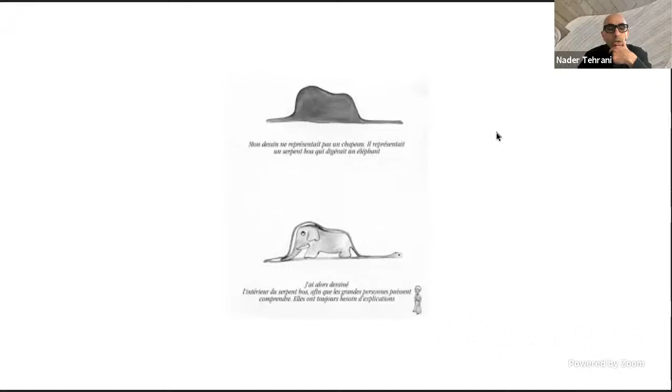The part to whole reciprocities comes into conversation with The Little Prince and the way in which our semiotic minds come into conversations with the things that we see. The hat or the ingested elephant suggests one, a reading that is iconic and on the surface, the other one, a deeper reading that has to do with the constitution of the inner workings and the organs of an architecture as expressed on the outside.

We've seen the way in which art is able to defamiliarize the known of a classical building, but sometimes we forget that within that same classical building, normative to our eyes, are organisms and configurations that are radical departures from the symmetries that we may see on the outside. So the complex and contradictory alignments and alliances that we make are part of this discussion.

In the context of the tectonic grain, more of a metaphor in my mind, it's a conversation not only about the directionality or the affect of a building, but it also has to do with the ways in which we understand things at different scales. The Devil's Tower from a distance and as a skyline exudes one reading, but at a close-up, we begin to see the horizontal traces of other geological strands that are embedded within that set of striations.

In the context of social engagement, as I said before, there are few projects that are more explicitly engaged in our collaborations with others. And the theme of control and collaboration are part and parcel of a common set of predicaments I'd like to underscore here.

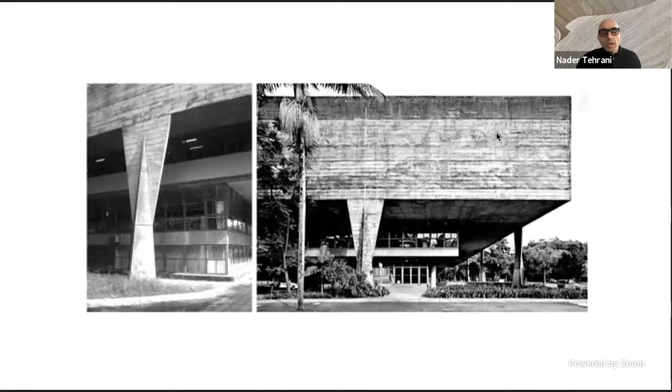The pedagogical buildings, as I said before, are these buildings, all of them schools of architecture somehow, that were born out of the crisis in 2008 and what kept us aloft from 2010 to just a couple of years ago, where the materiality of those buildings, their mistakes and their successes, invariably become didactic in their mission. And finally, our engagement with political entanglements has to do with a range of issues.

But political entanglements deal with a wide range of things, dealing with architects attempting to re-engage in the public realm in a world increasingly privatized, in our ability to think through infrastructure and engineering as part of that commitment to the public realm, and/or rethinking programming before we even start to imagine architecture.

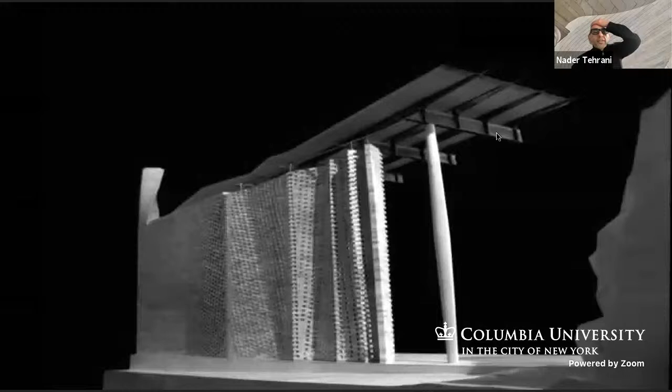So with that, what I'm going to try to do is actually go relatively fast through a whole range of projects, because it's less important to understand each project as it is to understand the perspective from which they emerge. The monomaterial ethic emerged in our minds very early on, some 20, 25 years ago in Casa La Roca, and our interest in thinking through, sorry, let me try again.

Is the animation showing or not? Apparently not. It's not now, but it was. Was it? Okay, let me try again. Is there an animation? No, it's just white. We're just seeing white. Oh, I tested it before. Well, okay, it doesn't matter.

What matters is that this was a building that, in the tradition of Lewerentz, we discovered through the invention of a detail that was somewhere between a running bond and a Flemish bond, what we called a variable bond, to exact a seam, a folded seam, through which lateral stability would be given to a wall.

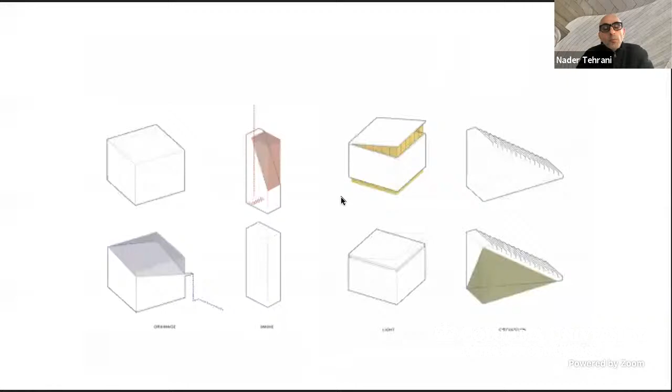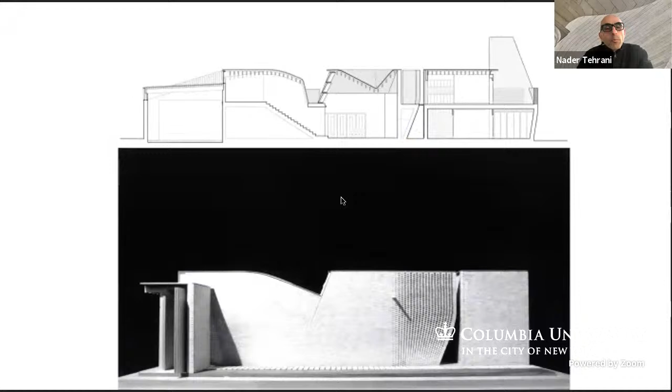We did indeed get to practice this and build it in a different project in Tongxian, China, where the materialities and the programs that were embedded in the context of this detail got played out in terms of the mechanical systems that were embedded in there, in terms of the areas of figuration that required bending and folding within the context of its facades, and where the brick is not merely just a material, but it is catalytic in the formation of the figure of the building and its organization in its entirety.

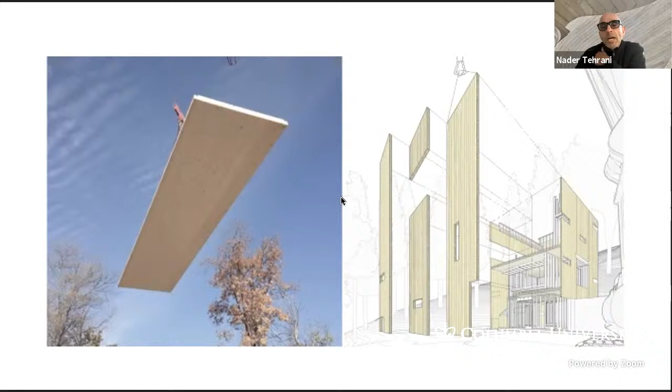Now, if that were to be seen as a detail, that detail can be quite large also, because in the context of cross-laminated timber, for instance, those bricks are planks that are 5 feet by 40 feet, as it is in the Sharon building that is here being organized for the Biennale, a structure that is essentially a rural apartment building composed of a series of apartments, all identical, circulated around with a single stair,

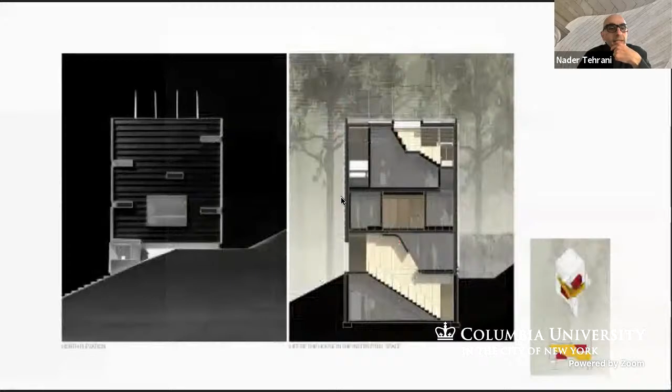with the idea that the CLT can only work actually if it is paired up with a stud wall on the interior, because that is the only way to ensure the transmission of air and electricity and all of the infrastructures that would go inside of it. A building that is relatively simple in its organization, because the stair effectively organizes it, but then most importantly, because of that, one gets to take advantage of its net to gross area by occupying all of the spaces above and below the stair, making it one of the most efficient typologies and organizations that we've done in the past.

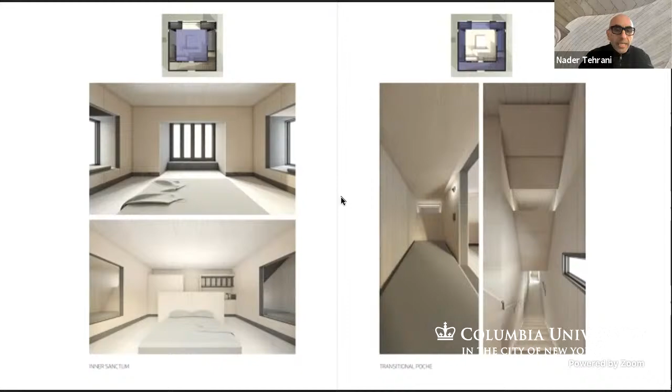And it's composed obviously then of two types of spaces, an efficiency that has a bed, closet, kitchenette, etc., but then a poché space around the edge of the building that is composed of these two conditions of showers, of toilets, of bunk beds, and these interstitial spaces, and then the staircase on the opposing side. And so the concurrence of these two is what creates an effect in this monomaterial condition.

The catalytic detail then has to do with the way in which certain details preempt and condition our understanding of certain architectures. Here, in the context of RISD, where Amal and Dan have their own building down the hill, we were tasked with the master plan of the freshman quad, within which North Hall, the dormitory, is composed as an almost too large a building that we wanted in one way or another to contextualize.

The idea of contextualizing such a building is almost ridiculous given its scale, but we decided to work through the shingling systems of the neighboring buildings, of which there are a lot, and draw them into dialogue with the east and west facade, which are the long faces of our building.

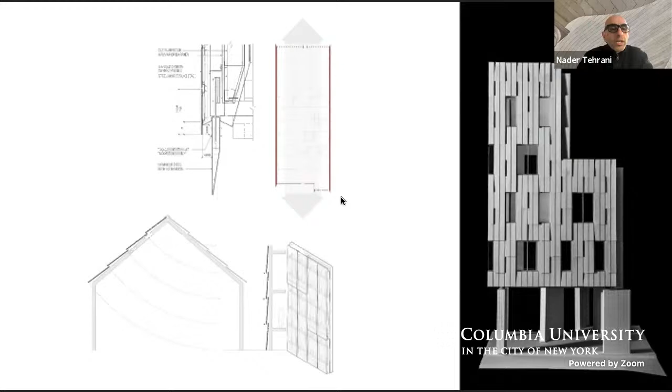This shingling then acquires a very radical presence given the orientation of the building, east and west, gaining the light and the shadow that it requires to give depth to what is otherwise a very thin face. But most importantly, the catalytic detail has to do with the condition of shingles overlapping each other, almost like an

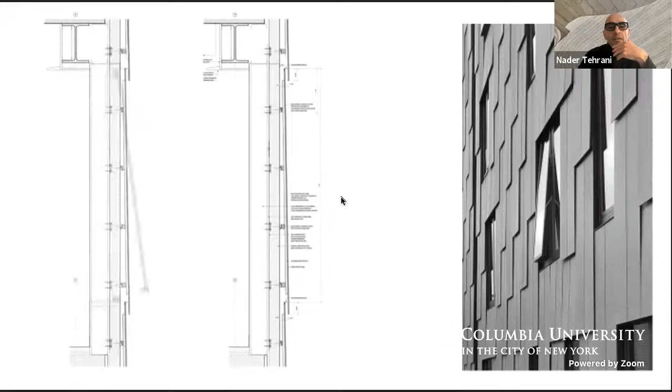awning window, and then using the alibi of the awning window to also reciprocate with the shingles. In other words, that skin and the window are doing the same thing and speaking to each other in the context of a detail that is trying to mute itself in the context of the urban landscape.

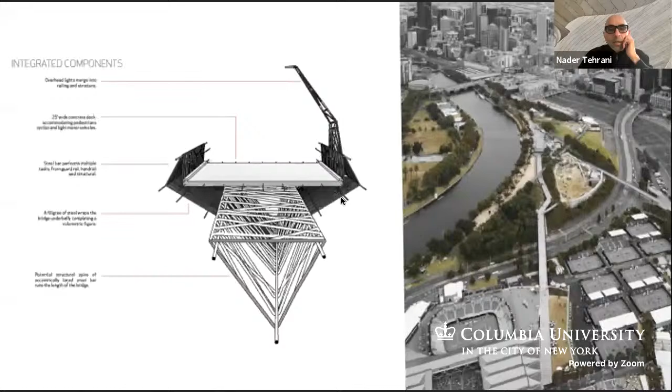Similarly, when we're dealing with an urban design proposition to create a connection between downtown Melbourne, the Yarra River, and the tennis open of Melbourne, we sought the presence of the means and methods of how to build with rebar as the precondition for designing the entirety of a pedestrian bridge whose presence is more known because of its connection to the park than to the tennis open.

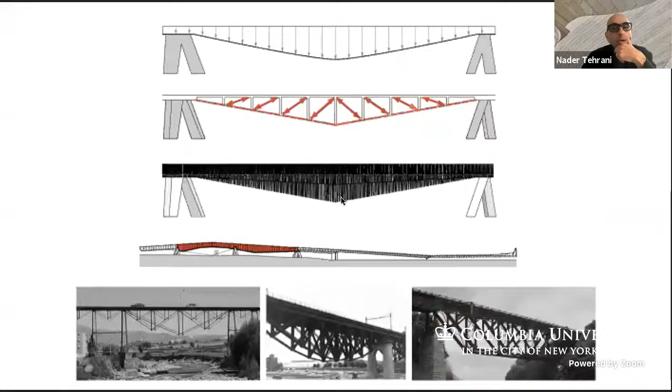The idea was to build a massive bridge over the highway that takes advantage of the maximum moment in the center of the bridge, dipping it down, but also eliminating the apparent difference between structure and skin by weaving the rebar both on the longitudinal and lateral axis and giving it a kind of presence, a web-like presence on both

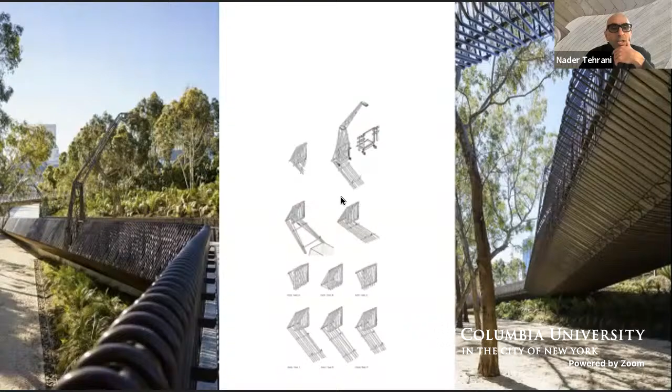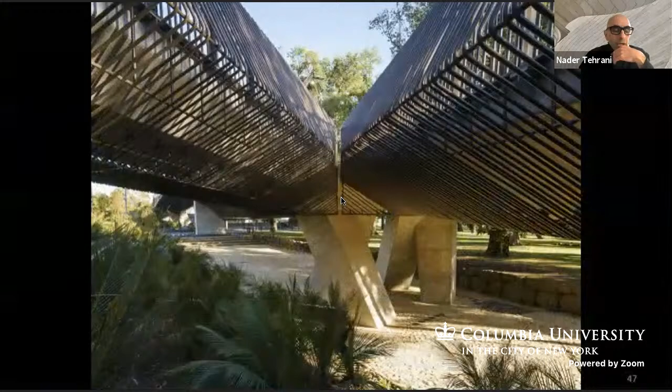axes. The rebar, in fact, has different dimensions, and it has a presence as an underbelly, as a rail, as a guard, and ultimately as lighting elements that speak to the silhouette of the skyline of Melbourne itself. The project lives in this liminal space between above and below. It is occupied above only 2 weeks a year, and the majority of the year lives in the nature of this park as a kind of trellis structure.

In the context of the Daniels School of Architecture, the Daniels Faculty of Architecture, Design, and Landscape, the operative detail of the shingle revolves in a fashion that runs north-south, using the cladding system as a mechanism to reinforce the lateral axis from east to west. The shingling conceals the apertures. The apertures are allowed by the shingling itself.

And in this sense, they reinforce the pedestrian access to the buildings themselves as they conjoin, the north side being the new and the south side being the neo-Gothic structure to which we attach. The idea of figuration and configurations also speak in tandem to each other.

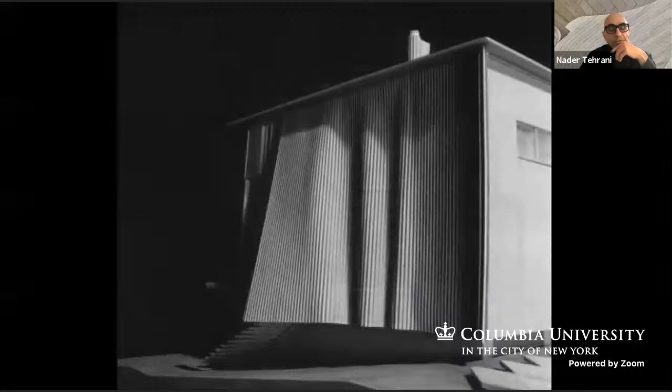In the context of the Weston House, for instance, the discipline that reigns it has to do with the idea of a ruled surface, the knowledge that the line at the top of corrugation and the bottom are the same length, and as a consequence, they allow for the material distortion to enable the unruling of a surface.

The animations just aren't showing, but let me see if I can cheat and show it this way. It's because of the presentation view, actually. So you might have to choose between the notes and the presentations, but hopefully that'll work. Well, I'm going to scroll through this without trying to fuss, although my wheel of death is now on the screen. Do you see it? Luckily, we don't know. Okay, well, now I'm stuck. So there's a commercial break here, but let me see if I can drag this through. I can't. I'm sorry. I apologize for this.

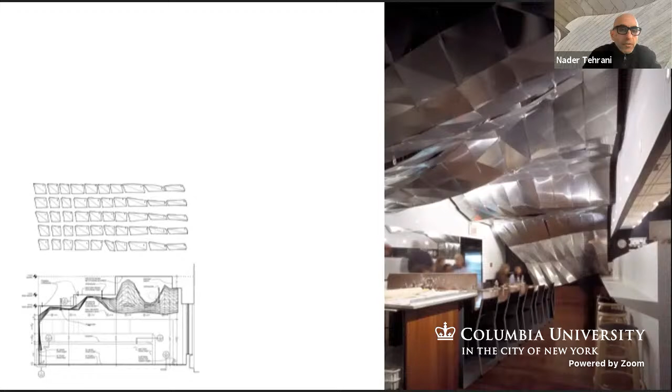And it's not that important anyway, but I think understanding that the discipline of the ruled surface and the relationship between a part and whole plays itself out in a similar way, though distinct, than Upper Crust, where the triangulation of flat sheet metal is able to navigate complex geometries and surfaces that in

our project in downtown Manhattan are then pixelated as smooth surfaces navigating complex structural forces from above and programs that are contained within the bodies of this dining and servery area for this corporation.

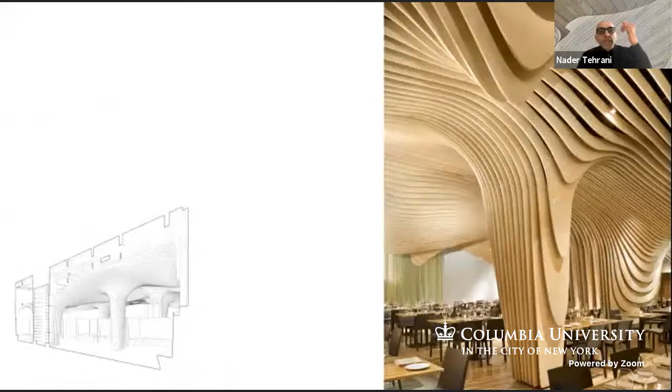Similarly, here, all of these, by the way, share one component that will come into play in the idea that the reflected ceiling plan in these contexts has a significant and vocal role, that it is maybe arguably the most important elevation in architecture today insofar as the sprinkler systems, the lighting, and so many of the elements of architecture come to ruin our lives.

But in the context of Banq, the laminar conditions of these proscenia that adorn the columns, the wine room, and contain all of the mechanical equipment are all a kind of precursor to the Adams Library that we are almost completing right now, which involves an important topography.

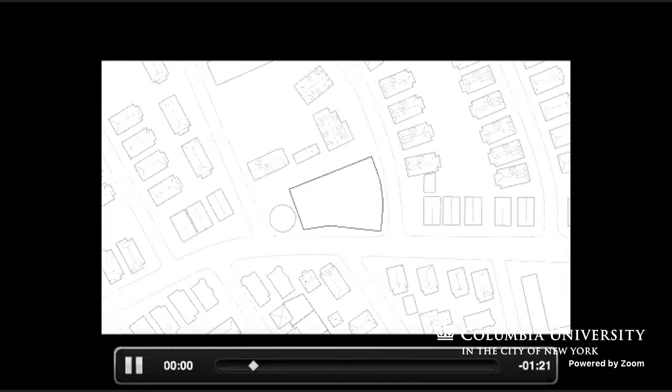And if this doesn't work, then we're really screwed. I'm going to try this. I think what you may want to do is unshare and then just reshare in the presenter mode. So you won't be able to see your notes for the animation, but we'll get the animation and then we can switch back after. All right, no worries. Let me get out of this. Let me exit 1 second. The wheel of death is taking over our lives for another round. So 1 second, I apologize.

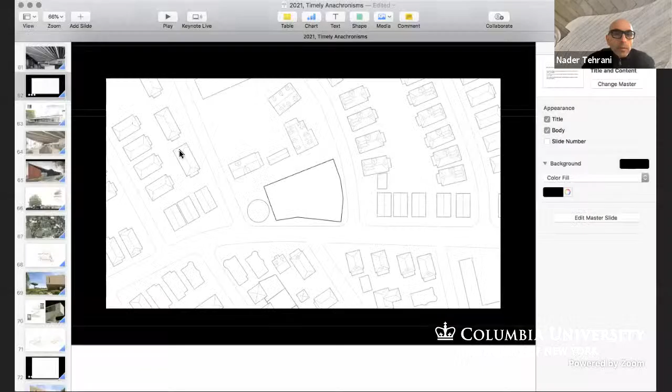Okay, so you're saying share again, like that. No, I'm not sure what happened. Is this showing? It's showing. All right. No, I don't know why, but none of my animations are able to show for some reason. This animation happens to be important, but let me try one more time. Give it one more time. My apologies. Maybe I'll escape all of the animations. I'm sorry, are you seeing it or not? We do not see a shared screen at all. No, so the screen is not even shared. No, I am, oh, sorry. Let me just try and move forward like this.

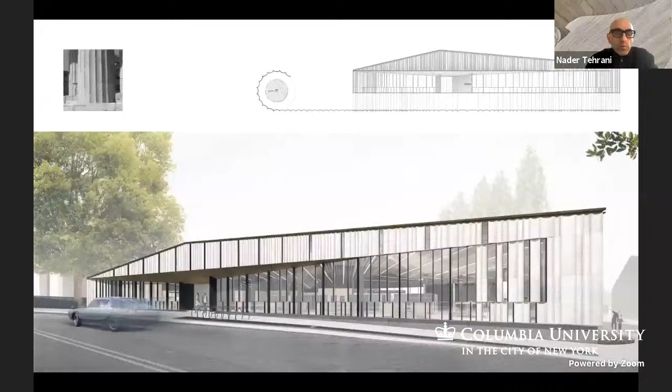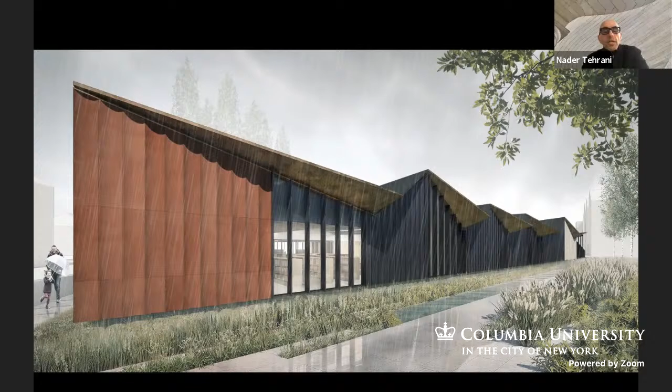All right, so in the context of the Adams Library, I really apologize that the animation is not showing. It is an important one where a seamless surface of a roof transitions from a front face that captures the length of Main Street, not only with a single pedimented roof, but a single pitch whose interior captures the transition of that single fold into the multiple folds of those very same surfaces of the roof into the programs of the back of the building, where the different offices, conference rooms, and meeting rooms are situated onto a garden where the overflow of the water is captured.

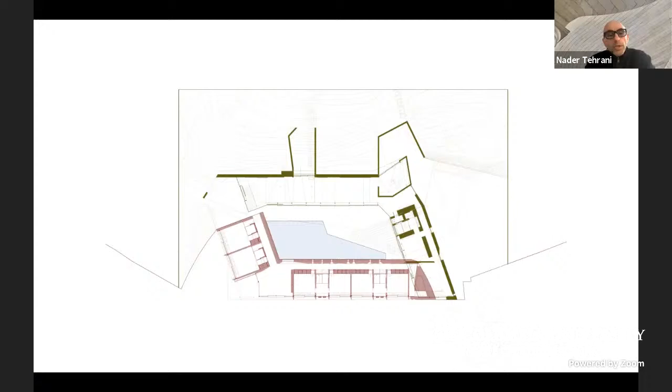And so here one realizes the presence of the reflected ceiling plan as being one of the most important elements of that project. And so too for the Villa Varroise in southern France, where the top and the bottom floor produce a kind of courtyard building, but in section, again, bringing together two elements of the landscape with the stair as a protagonist that holds it all together, a kind of loop that allows for not only the structuring of this building, but the insertion of the landscape going from the inside to the outside.

I have no idea why the animation is working right now, but let's not complain.

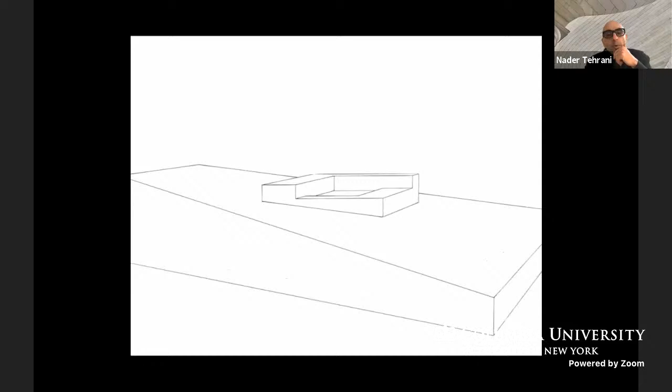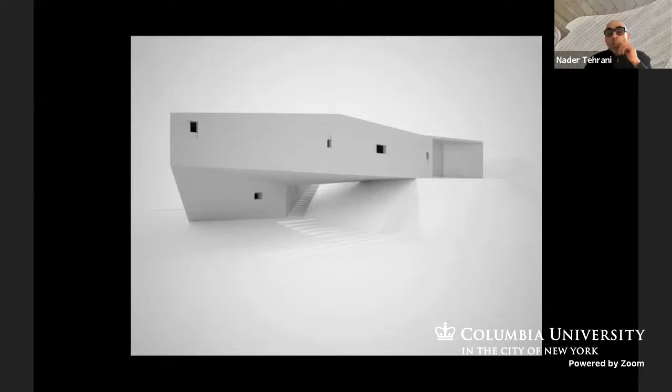The distortion of this pure type allows the plan to open up to the Mediterranean. The section allows it to drop on one side so that everybody gets the same view. The stairs on each corner connect to each other, while allowing the roof to distort to produce the passage of light and views towards the west, where there are the great views of the Pinus Pinea on the opposite side of the building. And so this now effectively built here as a monolith that invites the landscape towards the interior and onto the opposite side.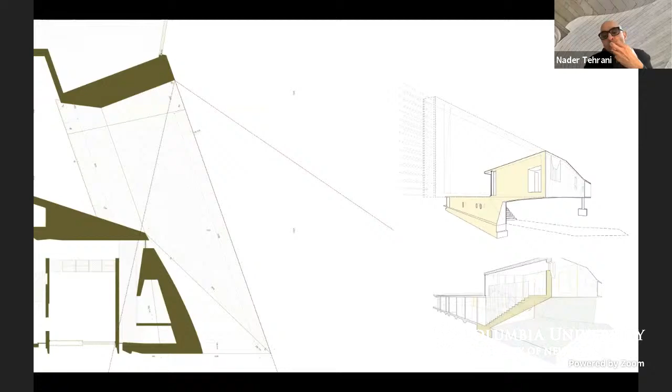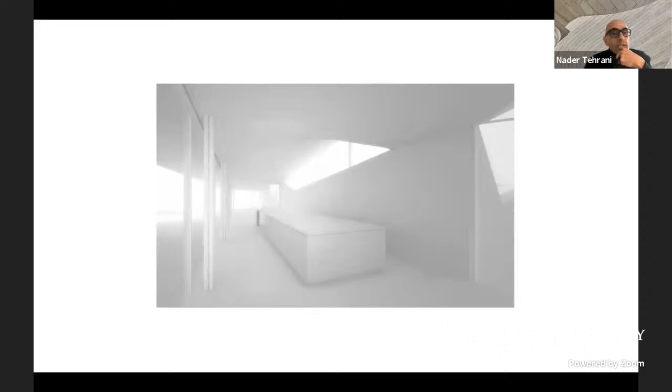The reflected ceiling plan, the distorted surface of that concrete being really the shrink wrapping of both the structure and the stair on that underbelly with an expression on the eastern face of the building. The building is rather simple, actually. It's essentially like a case study house, but in fact, as one navigates on the interior, you realize that the structural span is not only going laterally, but longitudinally, as the large vaults run the length of the building in order to allow the views to be opened onto the western side.

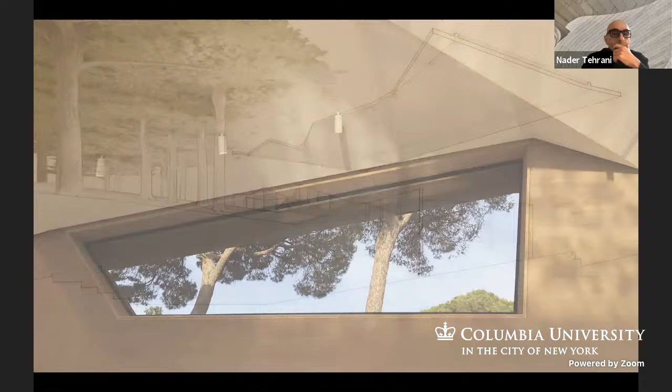The tectonic grain has a lot to do with the actual materiality of nature. Trees are different in their species and types, but they're also different once they're industrialized in terms of plain saws, quarter saws, and so forth. And so we are looking at the push and pull between these material grains and trying to understand what happens to them as they enter into the linguistic realm of construction here with the board and batten and the shiplap details, and to mine out of those details certain possibilities for transparency, operability, and so forth.

In this case, a barn in New England trying to eradicate the presence of the garage doors, flushing them out, but then allowing the door handles to become an unfolding of the very battens that are part of the fixtures and the handles of these operable doors.

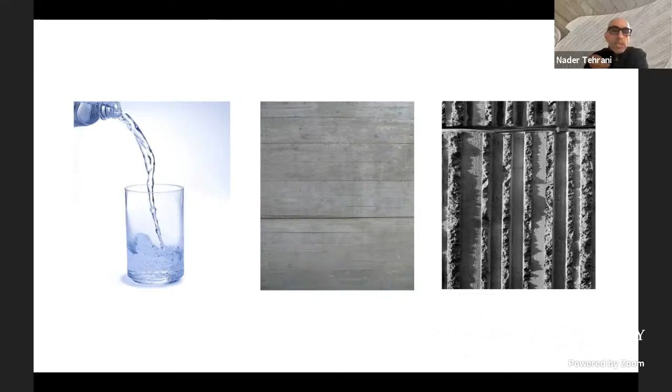In the context then of Villa Varroise, a lot of that detailing we hoped was going to be born out of a recognition, not so much of the aggregate parts with which we're so familiar, but a liquid tectonic which gains its expression from either the formwork beforehand or the manipulation of that concrete after the fact. And you have seen a lot of the historic and contemporary work around fabric formed concrete work.

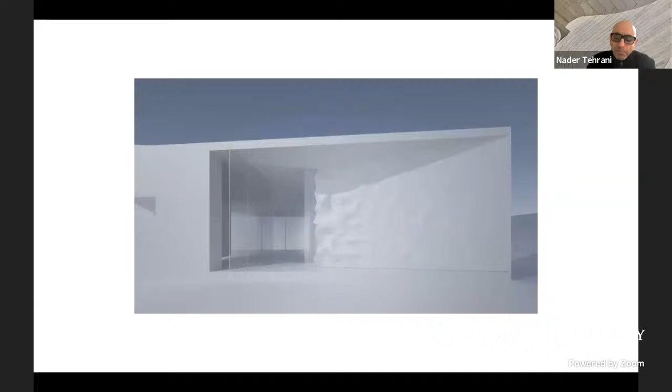Our task in this instance was to find a way to work with fabric formed concrete to embed into the smooth surface of the concrete a kind of rustication that is evocative of the landscape within which we were operating. Alas, somewhat overtly representational, we said, what if we took on a completely different approach and tried to extract out of the aggregates certain scales that are respondent to the stone walls of southern France?

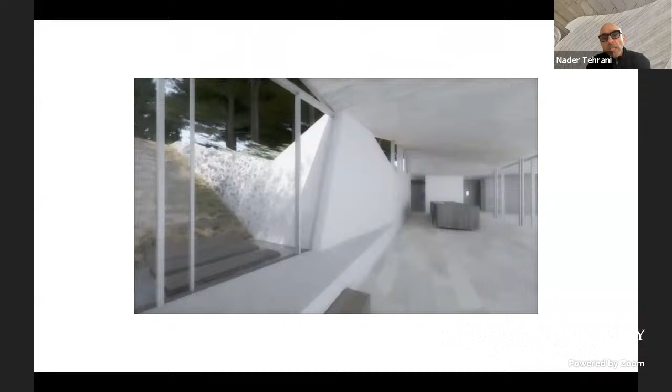And in that sense, the smooth interior would beget different panels with different sizes of aggregates, such that the figure-ground relationship between concrete and stone or mortar and stone is inverted by the time it gets into the landscape, and allows for those stone walls to demarcate different areas within the landscape behind their house.

And here, I don't know if this will work. No, this is another one of those refusing things, so I'm not going to waste time on it. I'm just going to go on. It's a heavy file, so it's just stuck for a moment. I apologize.

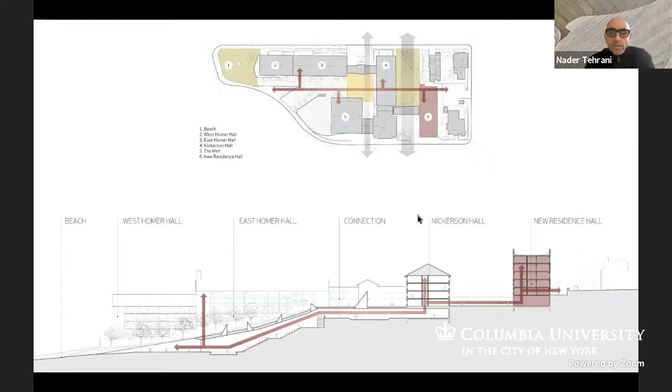In the context of RISD, where brick was the critical element to allow that building to contextualize itself within the context of the central campus, it also became the material that connected North Hall to the existing Nickerson Hall through a brick loggia, and became the foundation and the southern and northern face of this building. Working within a depth of brick, which is quite shallow, in fact, a veneer of brick, our task was to give the illusion of depth and weight to what is otherwise a thin skin.

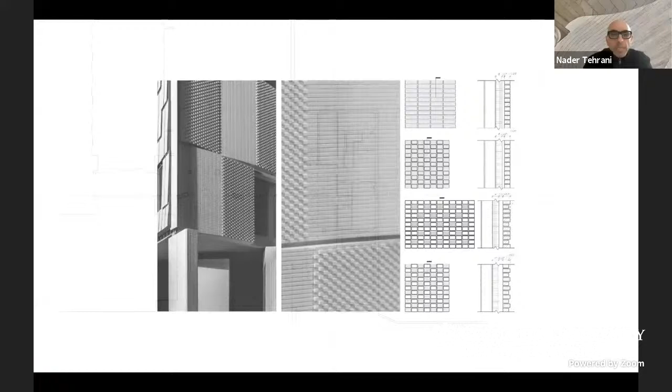And so creating out of that mass the possibility of weight and thickness was part of our way of allowing this building to speak to the kind of historicity of Providence, while working with prefabricated brick panels that are somewhat banal in their construction. And so each of these different brick panels, some are carved out, some are corbelled out, but the combination of all of them give the illusion of, let's say, 9 or 10 inches of depth where they only have 3.

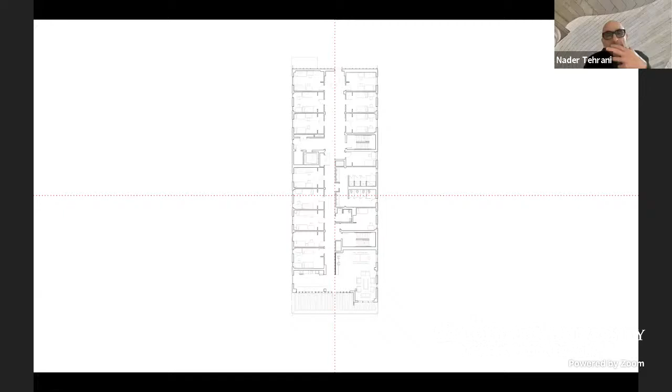In the context of the east and the west facades, then, we do exactly the opposite. How to radicalize the thinness of that tectonic grain. As they come to an end, the east and west faces are not merely veneers, they are exacerbated by the thinness of the blades that articulate the edges, and the fins that speak to not so much the turning of corners, but the bracketing, the bookending of that building on 2 sides.

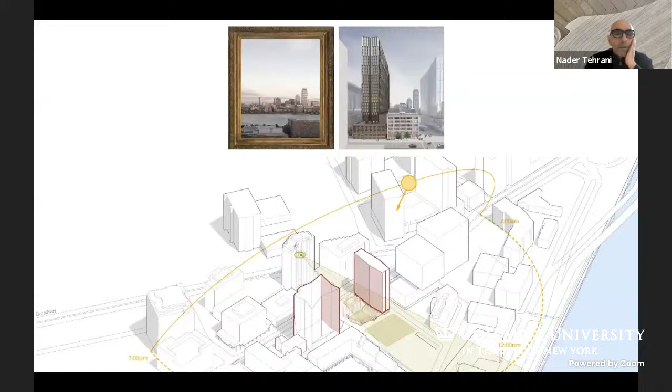A similar strategy is adopted for the MIT Site 4 building that is just completed. The overall massing of the building essentially rotating, so the apartments are not pointing south, facing south, but rather the building is facing south, meaning that all of the windows are facing east and west.

The cladding strategy adopts a way in which the folding of the facade, protected from the extreme light of the afternoon, while the paneling system reinforces a structural idea about the moment frame that is the entire structural system of the building, allowing it to cantilever north and south with a base condition that is distinct from those panels. The structural system skewers the building entirely up, while the cladding is allowed to oscillate north and south with different colors.

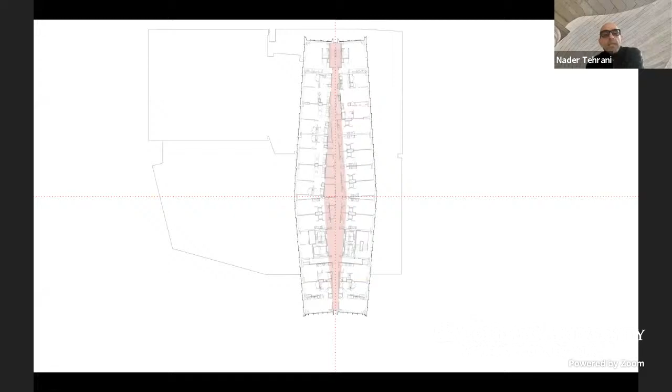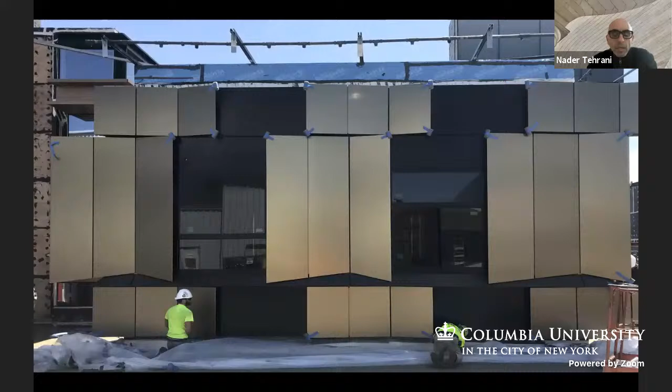And then the logic of the building is to minimize its thickness by containing all of the core service elements within its interior and thinning out the face of the building and its services on the interior. These blades, as thick as they actually are, are meant to objectify the thinness of those corners, the delicacy of this face that then captures the light as it faces the south. On the east, they evolve as pilasters that capture the morning light as the sun rises.

But everything that you and I do is in the realm of artifice. And so the imposition of these tectonic grains has a lot to do with what you and I are in charge of. In the realm of control and collaboration, we have done some work.

The most obvious, of course, in your neighborhood, with the broadening of a discussion about the closing of Rikers Island and coming to an understanding of all of the injustices that happen to not only the victims of those people incarcerated, but their families, the community, and so forth. And so this project, of which we were only a minor part, but a critical part in trying to understand how the justice system compromises so much of the city by being centralized and isolated, victimizing so many of the people involved,

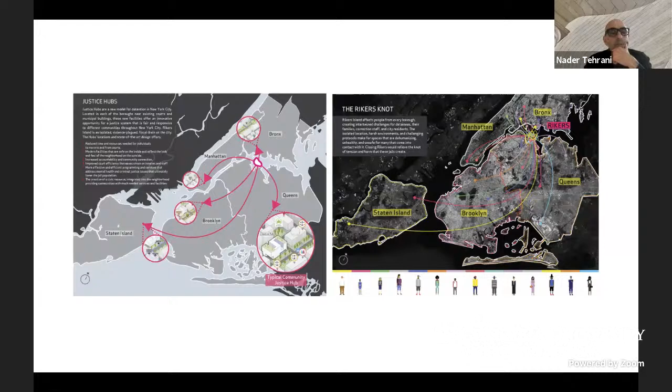If that is an overt relationship between architecture and social engagement, a lot of the other things are much more molecular. In our collaborations with individual artists, such as Adam Silverman, understanding his craft and his work was central to our understanding. I guess this may not work, it may work.

Adam Silverman's work is extraordinary in not only its formal capacities, but the way in which he's working with ceramics, the kiln and the glazing process, and the earth to imagine certain vessels that he makes. In this instance, we were researching certain lands within which certain artillery had become part of that soil, and he was interested in developing these bullet-like forms that became part of that expression.

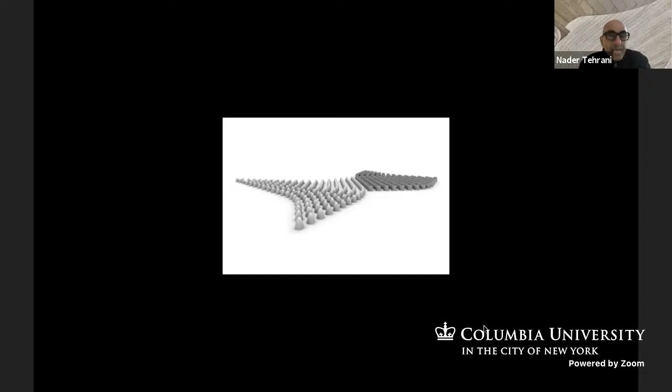What we introduced into his process was an algorithmic process whereby each bullet was cut into different metrics and therefore reconfigurable in different ways and in different places as the show migrated from one venue to the other and finally landed at the Nasher where it rests right now. That collaboration was central not only to what he was doing, but from what we learned.

In a similar way, our collaboration with Raya in Jordan, bringing our budgets together to imagine an installation that is rooted in the process of weaving, allowed us to work with a certain economy to hang a structure in the warehouse within which the Biennale was supposed to take place, but most importantly, to engage in a process of labor that as its end result was not so much the opening of the Biennale, but rather the unraveling of that same wool to make into blankets for refugees.

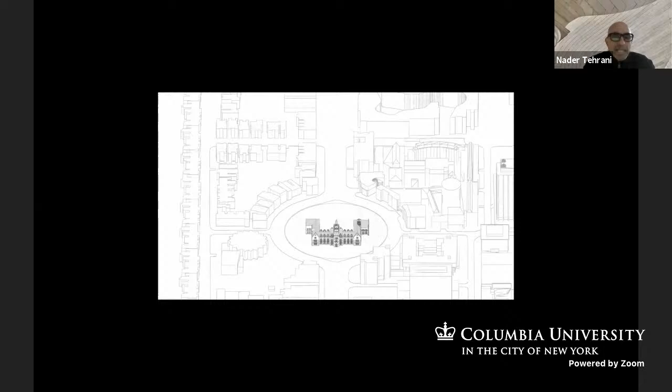If these are overt sort of engagements with the social, really the architectural project that is part of the building of large institutions involves many audiences, many publics, and in the context of the Daniels faculty, an engagement with the public realm. Here, the sustenance and the maintenance of the neo-Gothic structure, not only from the south side, but from the north side, was a big priority of the neighborhood and the campus.

To press the building underground, a good portion of it, to allow the tower to read both from the north and the south, and essentially develop a strategy that is indicative of the urbanism in the landscape that will revitalize Spadina Circle, was central to their mission. Part of that was an understanding that symbolically the building works north-south, but practically it works east-west.

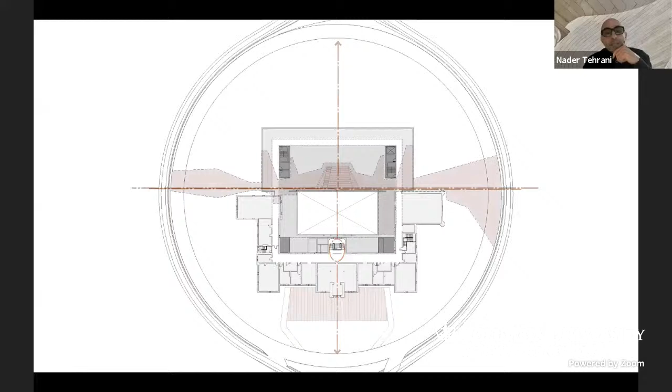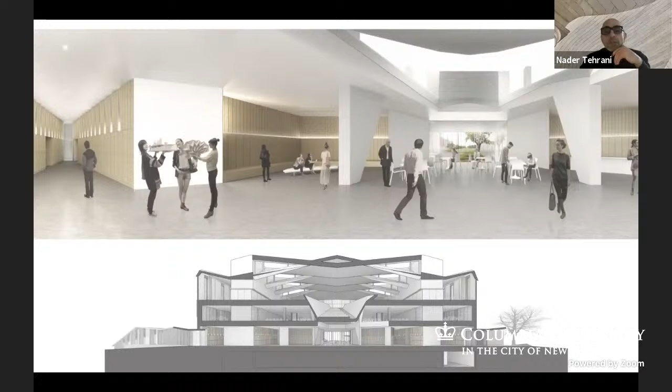In fact, part of its political nature was how to insert a street that is open 24/7, connecting the University of Toronto to the neighborhoods of its west, where everybody lives. And by doing so, allowing the interior not only to speak to Spadina North, but to look up into some of the critical spaces of this project, the civic space of the studio above, but also the fabrication labs that are speaking to the urbanism of the site.

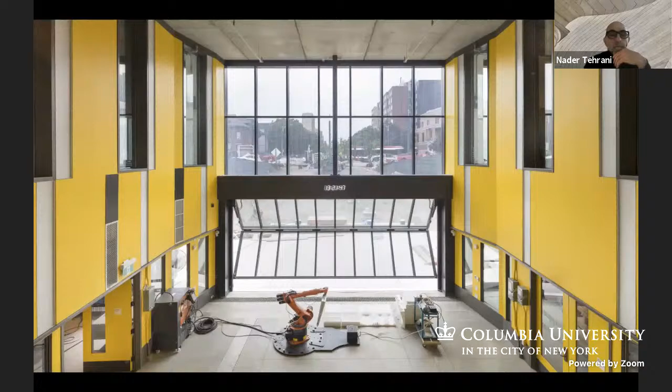As massive as this building is, it is a landscape building in the sense that all of its programs leak out onto the east, west, north, and south. The Fab Lab is a central part of one of those pieces that evolves out of the street, connecting to Spadina Circle to the north, and opening up with half of the work spilling out, and essentially looking back into the street from the outside, and then revealing the ongoing pedagogies and the work as one looks at the studio space in the Fab Lab from a distance.

In the context of the Adams Library, one of the most challenging aspects of this was that it involved a year of collaborations with neighborhood committees that disallowed us to design in the way that architects are used to designing. We were meeting with different focus groups, from the elderly to teenagers, and from teenagers to kids, to try to imagine what the spaces of their three sectors look like, all while maintaining the centrality of a control station at its center, bringing them all together.

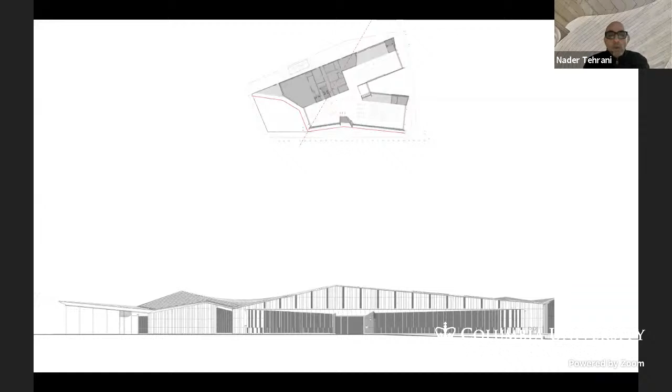The planning of this is less architectural than the kind of organization of an informal settlement somehow. And yet, it is important to recognize the anamorphic way in which that informality projects itself onto the neighborhood. The very figures of the roofs that are indicative of that context operate on the axial or the oblique axis from the north as you look at the building. And yet that obliquity is then reverted to the axial as you look at the building head on from essentially the main street, where only a portion of that anamorphic figure is revealed. With the North Garden in a way acting as a hinge point for that project.

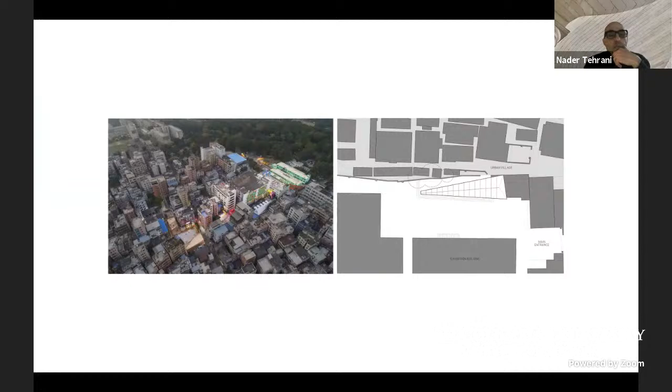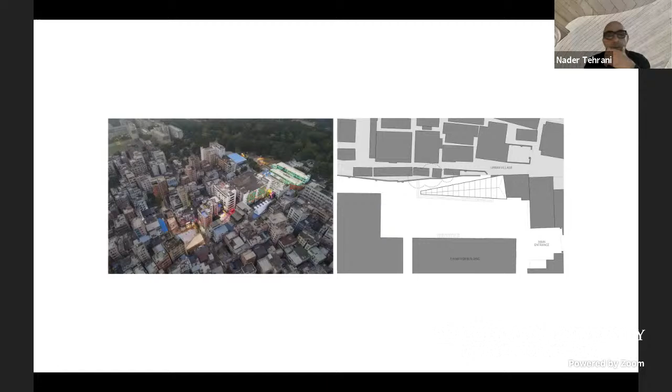Other projects that we've tried to take on have to do with the idea of creating permanence out of Biennale projects that would otherwise waste a lot of material and resources and ingredients. And in the context of the Shenzhen Biennale, the idea that the scaffolding that we created becomes a permanent extension of a cafe and a marketplace that is able to live on long after the Biennale is over. And so the major coup here was possibly not the design so much, but the idea of a civic place that has a life long after we're departed.

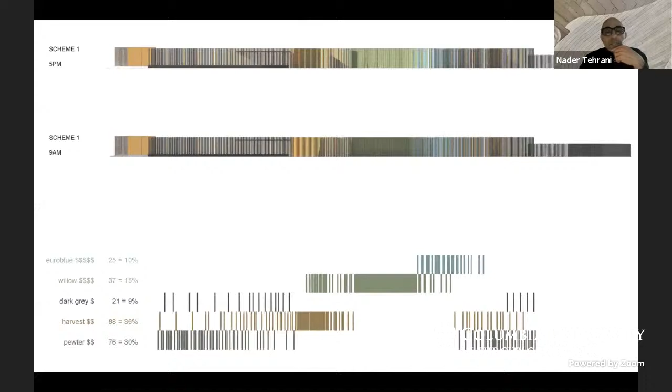And in the context of Austin, Texas, the idea that a civic city center is actually occupied by the electrical exchange of the Austin Center, with us as designers of the civic realm designing only the periphery with these precast elements whose colors in a way are a registration of the different electrical programs that are on its backside. All of these involve certain kinds of political entanglements that become more evident in some of the difficult projects that we've taken on, and where I will end the talk.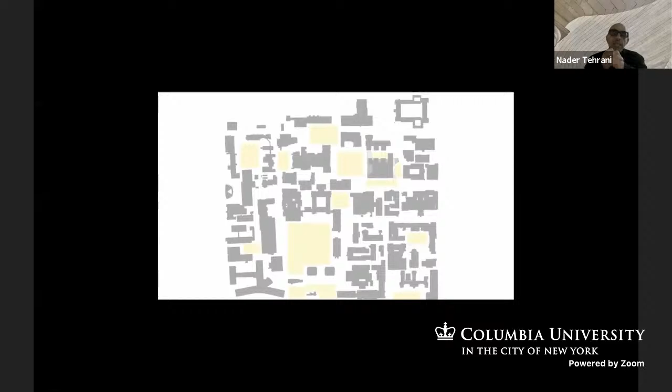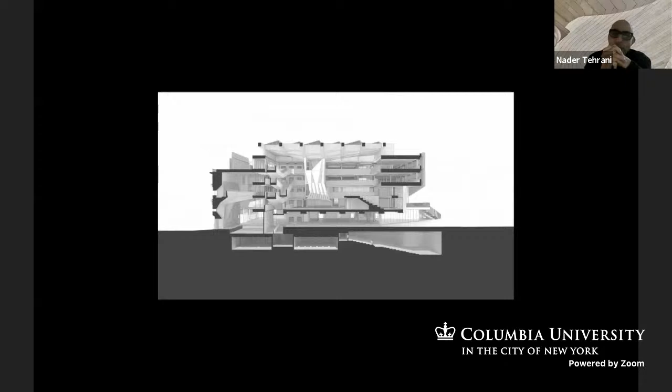Here in Melbourne, where a mat building so dense is positioned at the center of campus, as an extension of its neo-Georgian courts, we realized that the only way to bring light and air into its core is to introduce yet another court into the center of the building, where the commons, as it were, of the building could come together. Those commons are characterized by an exhibition space to the left with informal teaching areas, and in the center, what ended up being the studio space, but was designed really as a social space.

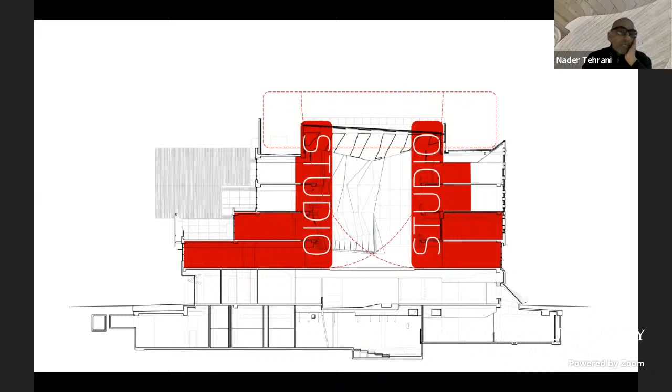What is important about this project is that it was designed with dedicated studio spaces, what Melbourne never had. And within the first month, we recognized that they didn't have money for that, and they were able to forego it entirely as a kind of building that had non-dedicated areas of work. What we did instead was to propose to them the elaboration of the circulation areas of the atrium, to widen them ever so subtly by introducing dedicated desks, collaborating tables and crit areas, and then allowing them to leak into adjoining classrooms and studio spaces and exhibit spaces for certain portions of the schedule of the building.

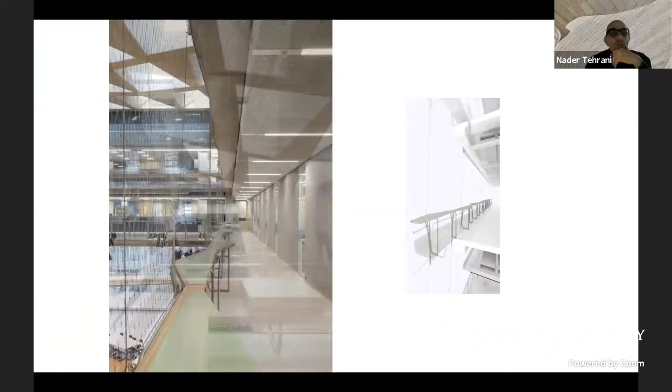And by doing this, of course, you're able to eliminate the railings that would have normally been there, put a mesh that contains them, and then use the infrastructure of the FF&E to allow for the building to be populated 24/7 in a charrette mode, as they would have wanted it to be.

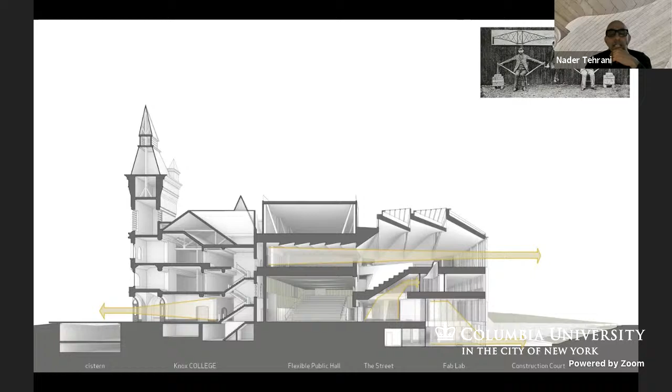The crowning moment of the Daniels building had to do with the translation of this concrete building into its vaulting system. And that vaulting system was something that was meant to bring the lighting, the hydrological control of the building, and the spanning of over 120 feet into confluence.

We were told it was not buildable, even though we had brought to them many examples, including Felix Candela, to show them how shell structures or surface active structures operate. They told us it is $1 million over budget. So we built that within the context of our fabrication lab through a stick system.

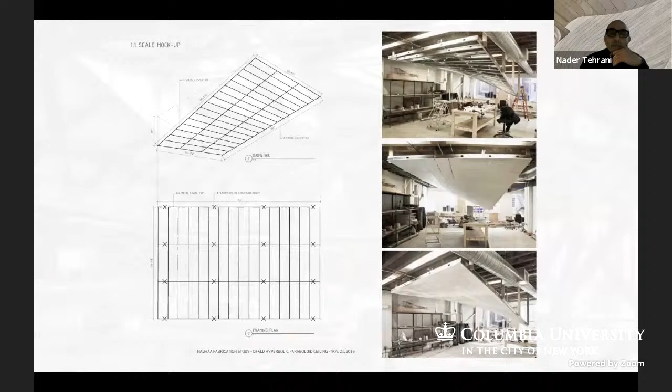And with that kind of rhetorical act, they were able to rebid it in a metal system and bring it $800,000 down. And with that, the project continued in the fashion that many of our projects have undertaken, the design-build collaboration, to enable the kind of transformations that these buildings require.

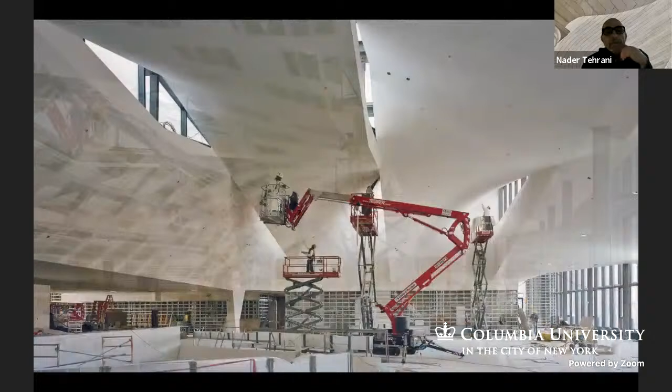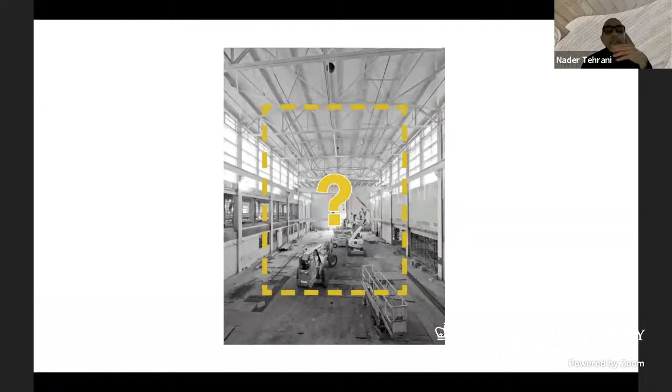In this case, with the heating in the ground and the cooling in a radiant panel within the gypboard, this was also imbued with an environmental narrative as the building came to be closed in and then used in different ways. The pedagogical building then has to do with the ways in which these teaching buildings are not places of learning only, but that their details are critical in understanding how they work.

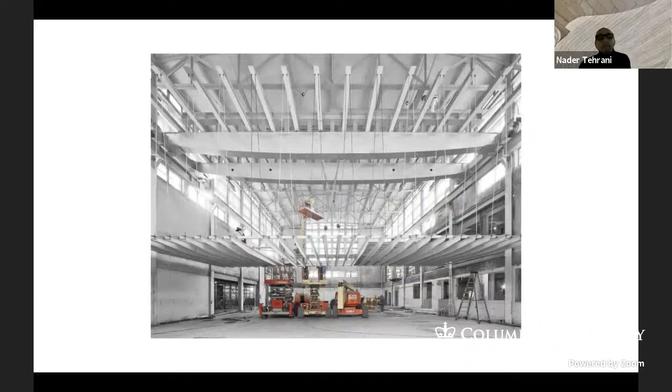Much like the Melbourne building, the Georgia Tech building is this research lab that requires flexibility on the ground. And because of that, we treated the roof as its foundation by suspending ancillary studio space from the roof, by suspending a second means of egress, and by suspending the lighting from the top. We were able to kind of invert the traditional tectonics by allowing the ground to be absolutely flexible and a certain kind of levity. This exact same strategy actually was used for the Melbourne studio space.

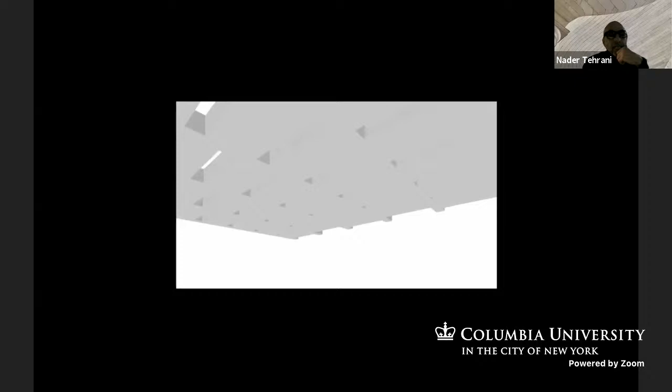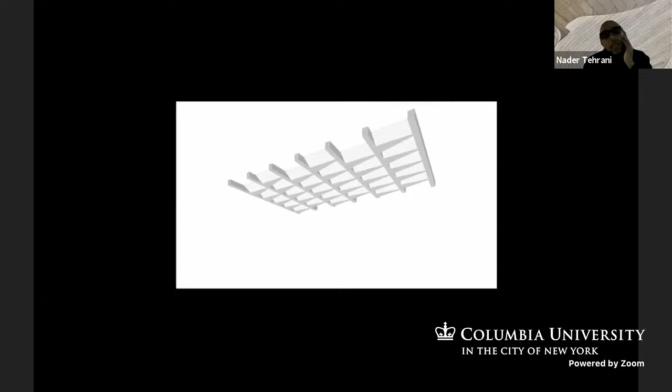Within all of the non-dedicated studio spaces, the roof and the studio space were brought together in conversation with certain precedents to imagine an LVL system of structure that spans some 30 meters with lateral bracing through its coffering, allowing natural light to enter into the space without any direct sunlight, and then suspend those dedicated studio spaces from the top down with a kind of bulge of an entasis, with a structure that stops short of touching the ground. This structure then is a central, let's say, totemic artifact that brings this into play.

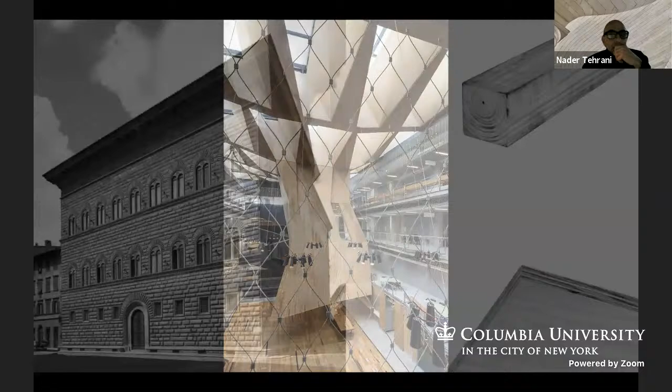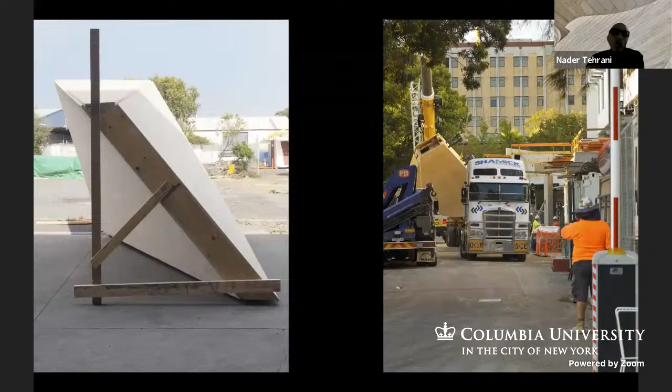Inverting that tectonics involves massive timber elements that are at the top and thin laminar plywood at the bottom. You inhabit the lumber at the top, and then you witness the thinness of the acoustic baffles of the cladding of that same structure at its bottom, the combination of which is done all in prefabrication that comes onto site and frames the space. So successful at a popular level has been this building that people all over campus come to it, disallowing the architects to get their work done.

So with that, let me open up the floor to Amal, and we can open up into conversation. Thank you. Sorry, Amal, would you like, yeah. No, this is great. Thank you. Thank you, Nader. This was amazing. It's always good to be an experiment. So thank you for a lecture that's entirely fresh and where you're using us to test ideas about the structure. I apologize for some of the tech problems, but we'll iron that out as part of our next experiment. Exactly.

But I know you're working on a book, and this is a kind of preparatory talk. I think it's a really interesting, beautiful way to enter into your work, sort of taking bits and pieces and parts and regrouping them and reassembling them in new ways, which I think your work does quite a bit. Amazing dive into, I love the notion of the material catalyst and reading that across scales in different projects, and the capacity for materiality to really do more than occupy surface.